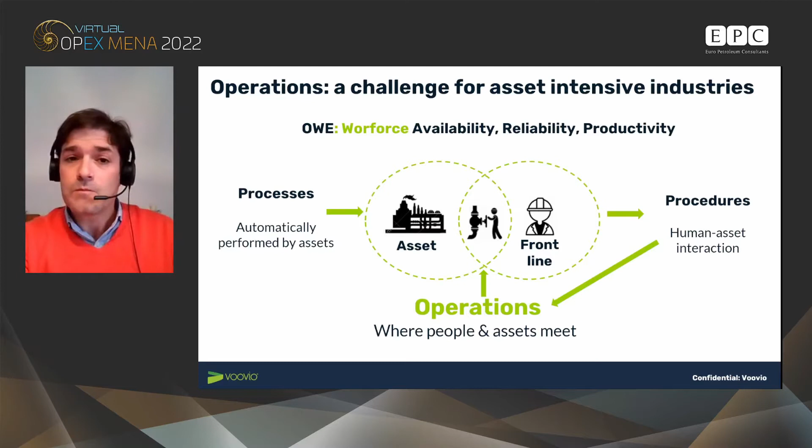Now what we kind of see is that there is a lot of investment done in the asset side to extend the life cycle of the asset. But what about the other side of the equation? What are we doing for our people that are running the assets? Because let's be honest, just putting in their hands a PDF is not enhancing or making their job easier. This is what we are bringing to the industry: a platform that is enabling frontline workers to do their job in a more reliable and productive way for basically the P&L of the plant. So quickly, let me jump into our demo so you understand the nature of our product.

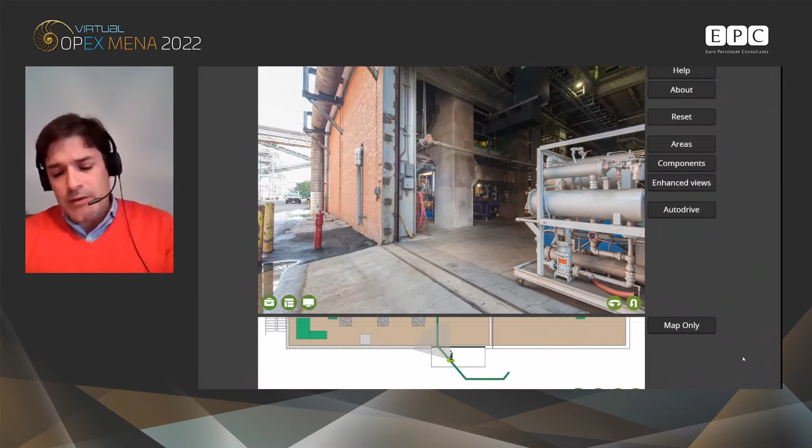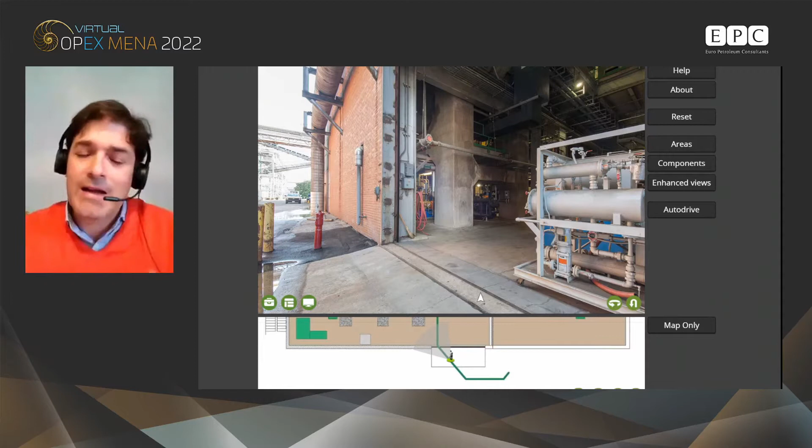As mentioned before, we have an operational excellence platform, and the first step we take to create the platform is create what we call a digital replica using our proprietary technology called enhanced reality. Now what is this about? As we are doing this event virtually, maybe you will see a little bit of lag because I'm doing this real life, so please bear in mind that in reality it's completely smooth what you're going to see.

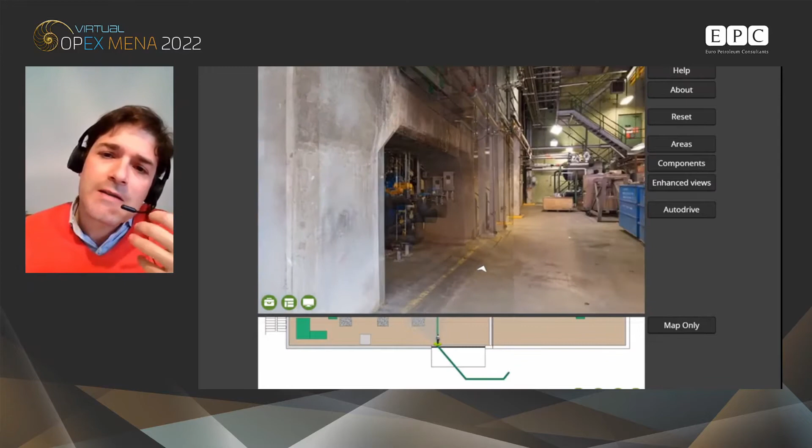Now here you see there is a white line showing up, this is because I'm clicking my mouse. When I drag my mouse forward, you will see that I accelerate, and there is a moment that a transition happens. As you can see, I'm walking in this powerhouse in a complete free way, such that I can make decisions where I want to go, where I want to stop. Here you can see there is even a crossroad, and I could say, hey, I want to go to the left, or just drag my mouse to the left and continue my journey.

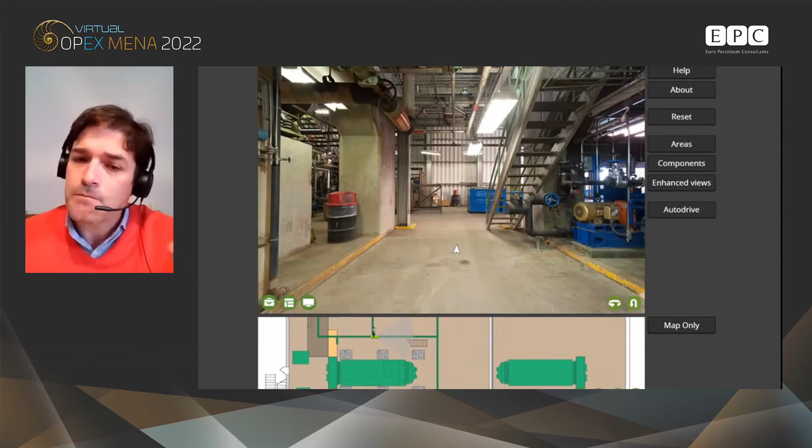I can stop anywhere, I can look around, I can make a U-turn by double clicking my mouse. This is the magic of our technology, creating a photorealistic environment that you can traverse in a continuous way, which is basically bringing immersion to the user, to our field operators, that is critical for the simulators we will see in a minute.

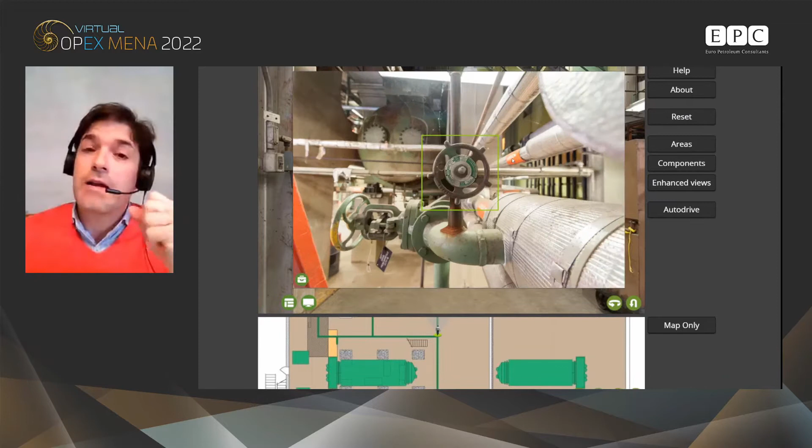Now, what are the things we have in the replica that are really useful? You see here a green box that when I click on it, I will get a detailed view of this component. I can actually interact with it, I'm the one who is right now opening and closing the valve. This is common in our replica: whenever you see a green box, it means there is a component there that you can interact with, and it will behave as in reality.

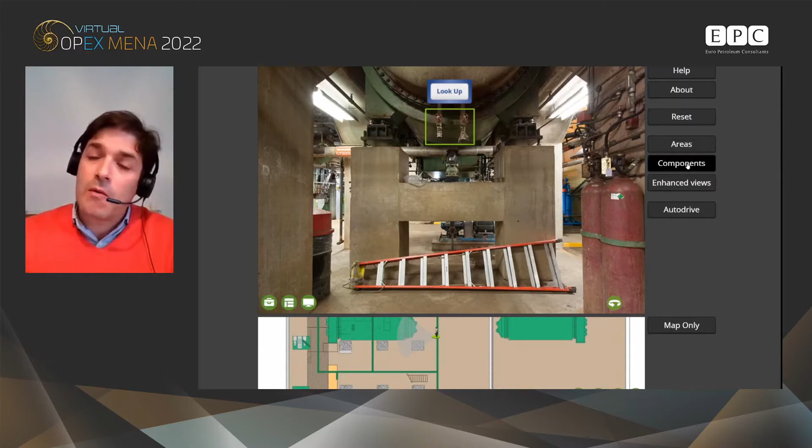Now, all these components are accessible by our components list, which is giving access to the field operator to all of them, and you can even do a predictive search — say I'm a maintenance engineer and I have to go do an intervention in 119, instead of popping up the P&ID and walking down the line or calling the SME, I can just go here, type in 119, and here we are.

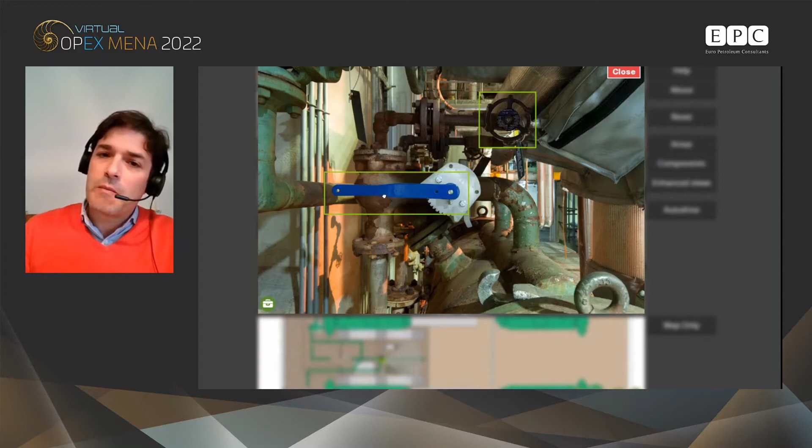The system just brought me to the butterfly valve that is actually in the mezzanine level, as you can see in the map. So right now we are in between the two turbines next to the stairs. And this is very important.

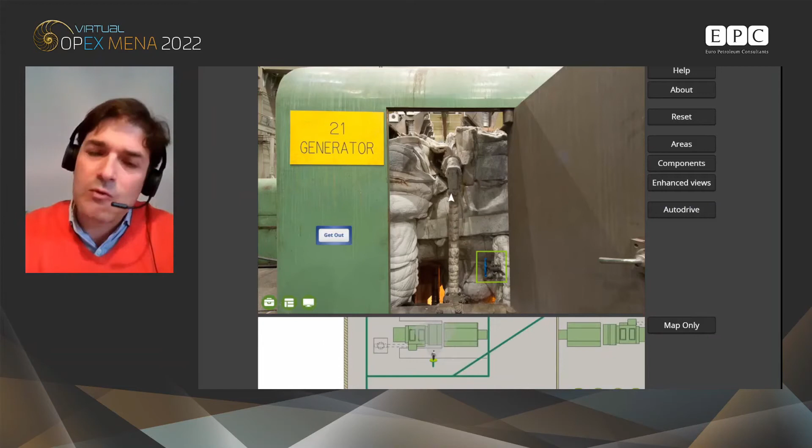This is the nature of our technology, which is visualization. This is not intended for engineering purposes. This is about the field operator being able to find himself in the asset and not being dependent on an SME or another operator.

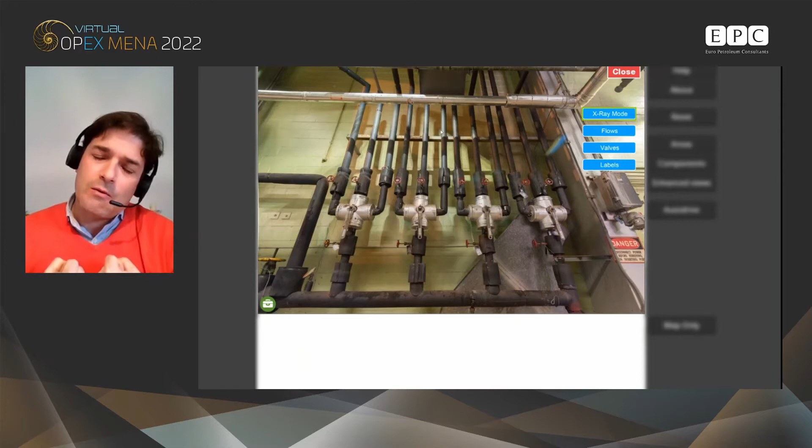Now, another feature that we have in the replica that is very relevant is what we call the enhanced views. This is a way of explaining how complex systems work from inside out. You see this manifold, perfectly well designed, everything parallel, perpendicular, but from an operations perspective, this could be intimidating, precisely because everything looks the same.

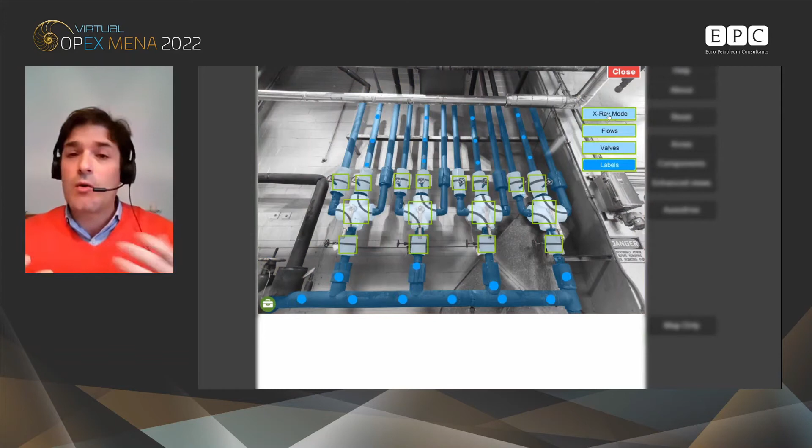So what we're doing is giving the operator the option, by clicking these buttons here, the X-ray mode and the flows, to see what is going on inside the system. So here, let me show you what happens.

I'm on the right-hand side of the screen, and I'm going to align the upper line with the downstream loop. So I can go here and say, okay, I'm going to open this valve, open this bypass. So here I've been able to see how to connect the downstream loop with the upstream loop in a very simple manner, right?

At the end of the day, as you can see, what we're doing is giving our operators the capability of understanding what's going on inside the system prior to doing any execution in the field. So we are, at the end of the day, bringing confidence to them.

Now, this is very quickly, I have shown you the replica. Now we move on, and our platform again is about covering all the bases of the field operator. That means the next part is creating simulators of the standard operating procedures that we just saw before in the graph. This is the nature of the work that the operators do in the field, which is execute procedures. So what we do is create simulators for each of them.

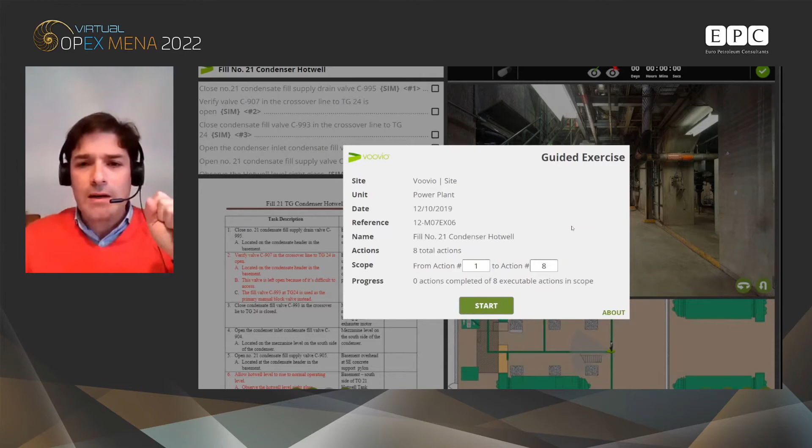So here we have 5 different SOPs, and for all of them we create 5 different modules. The first 4 are basically aimed at training and qualification of the people, and the last module is aimed at execution in the field. So very quickly, let me show you how the guided module looks like.

As you can see, we have the replica here on the right-hand side, and here on the left-hand side we have the SOP itself, everything related to the SOP, the document and the checklist. So the system is guiding me.

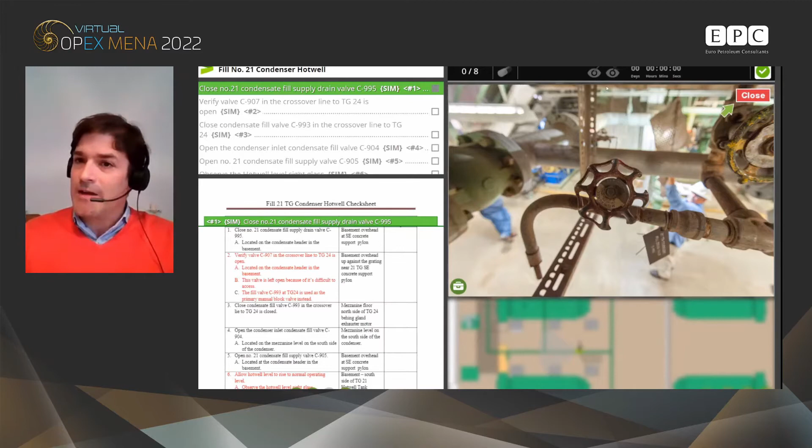So it's telling me, hey, first of all, you need to close this valve. Okay, so I go and do it. I close it. The system acknowledges that I have done it, and it tells me to click check. Okay, great, do it. So now it moves me to step number 2. And here is a hidden valve behind that line.

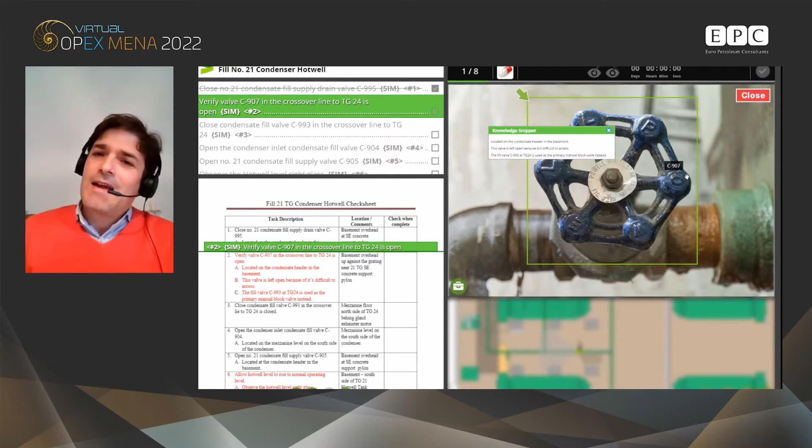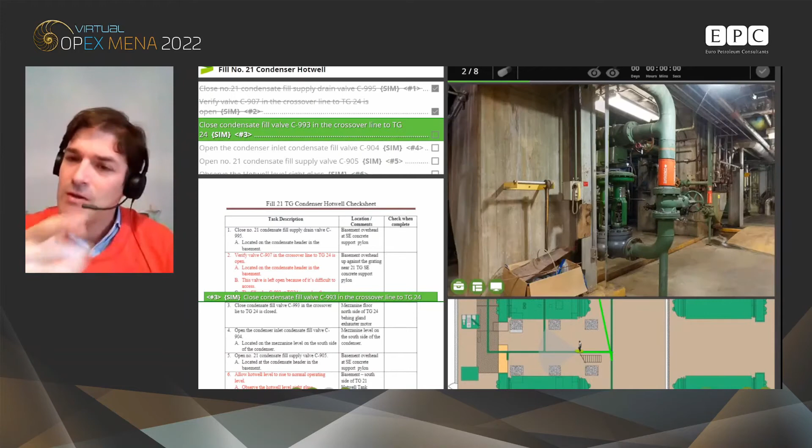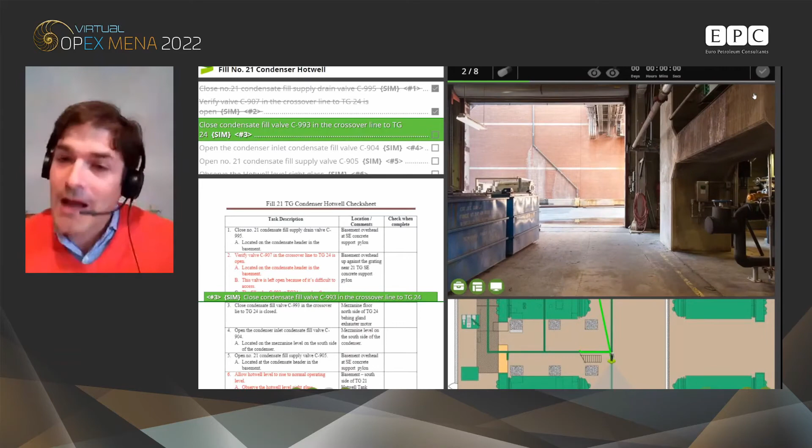And here pops up something really relevant, which is what we call the knowledge snippets. This is a way of capturing tribal knowledge, taking the expertise of your senior people and putting it in a place that is relevant to the operations. Understanding or knowing that this valve is always open because it's very difficult to access is always relevant to this particular SOP in this particular action. This is what the knowledge snippet is doing, enabling the organization to capture the tribal knowledge and make it owned by the company and shared in a standard way with the rest of the organization.

So as you saw, I just did the second step, which took me to the third step. So this is, very quickly, the guided module.

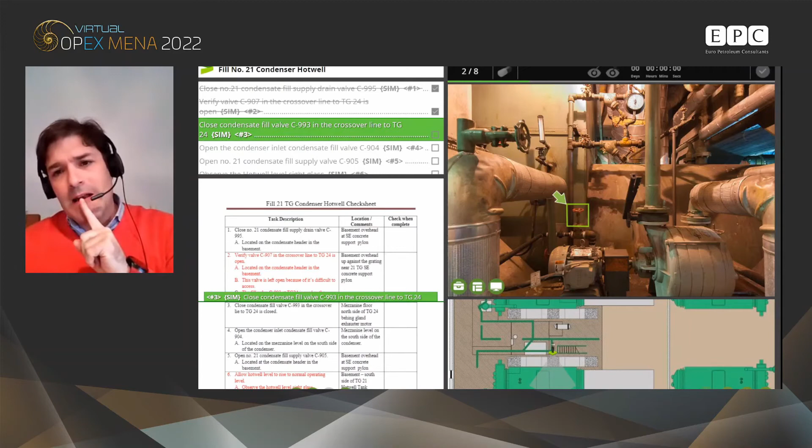Now, imagine you're a field operator and you say, hey, I've been doing this guided module for the last 10 times, I feel that I know what I have to do. Okay, great, so go to the test. And this is what we have here, the test module. Now, as you can see, nothing moves. There is no aid.

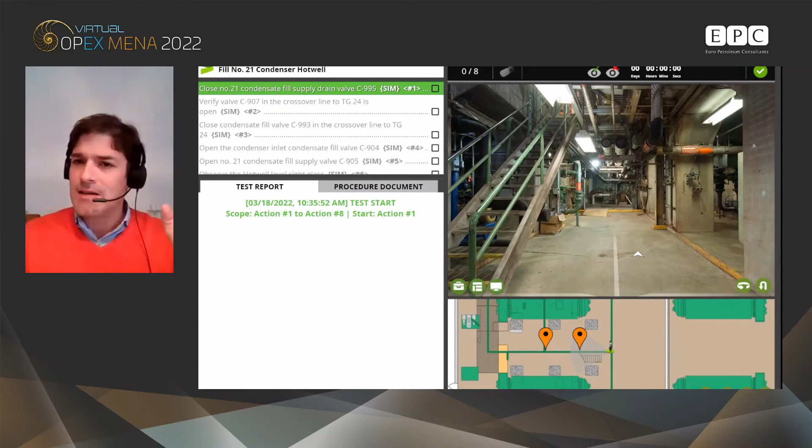This is like the real thing. You have the checklist and the SOP, and you have to prove that you know what you're doing. So let me show you very quickly what happens when you do the first step correctly. So I know this is the first component. I click check, and the system tells me, yep, you did it correctly.

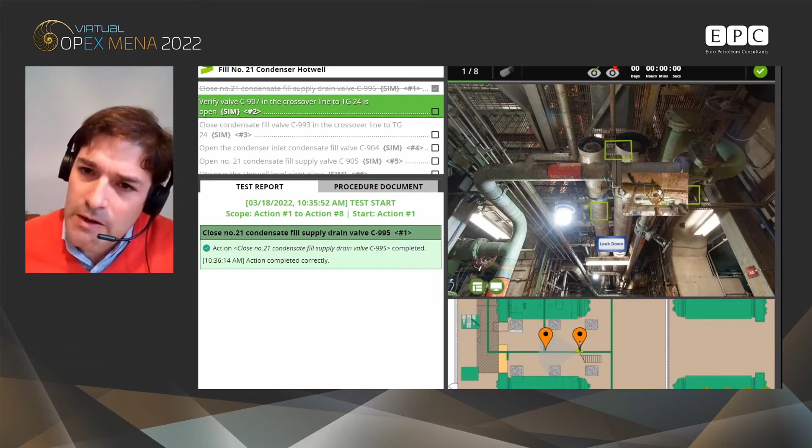Excellent. Let me show you what happens when you make a mistake. So here I could get confused. This is the second instrument. And the system is telling me, nope, you made a mistake. As you can see, you manipulated another instrument, 905, and now the test is giving us a couple of options.

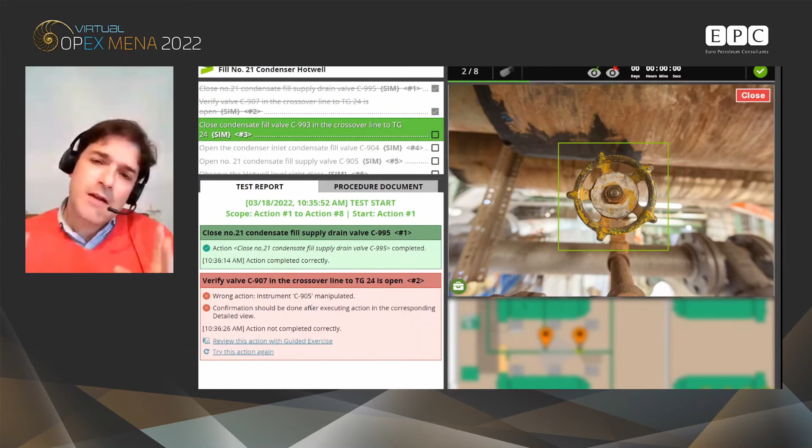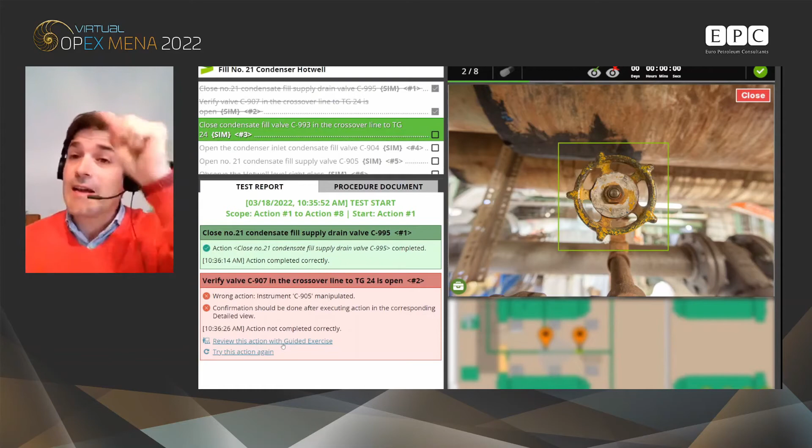One is to continue the test as such, review this action, as you can see in the red box, this action in the guided exercise, or actually try it again. So, and this is what I'm going to do. Try it again. So when I click, as you can see, everything resets.

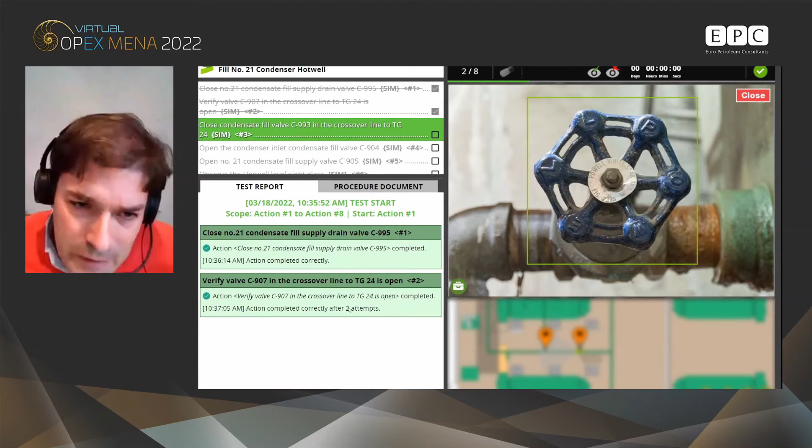And now let me show you what happens when I do it correctly. This was the one that is hidden, it's already open. So here we are. When I click check, and now the system tells me, yep, you did it correctly. But if you read carefully, you will see that it says 2 attempts is what it took you.

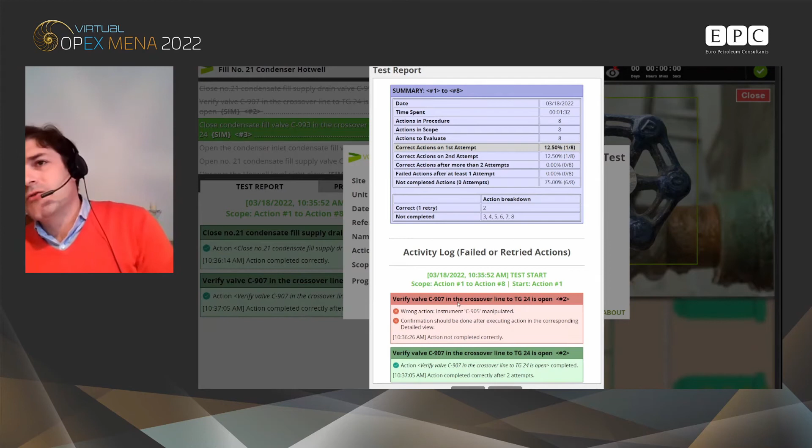And this is because we are recording everything in the background. And all this data is collected in a data format and made available to the organization, to our customer. And we collect the data related to the execution, and in particular with the mistakes that the people have made in the field. Why is that? Because all this data is fed into our platform, made available to our customer.

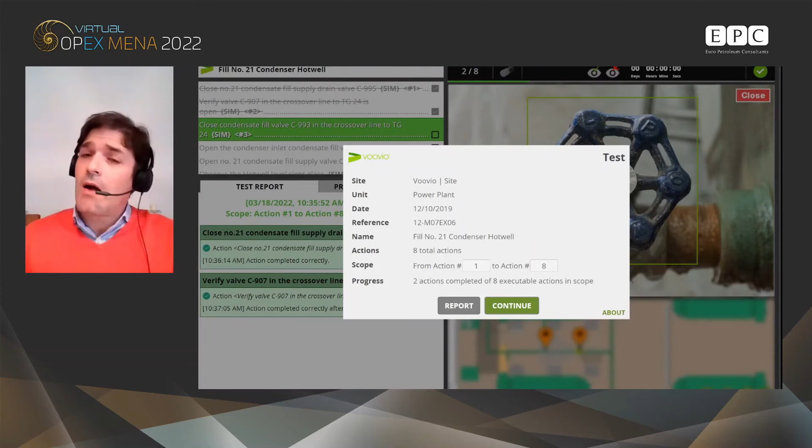I'm not going to go into detail, but I just want to show you one sneak preview of one thing, which is with all that data, we can build what we call the competency level of your shift or your crew of people with respect to a particular SOP.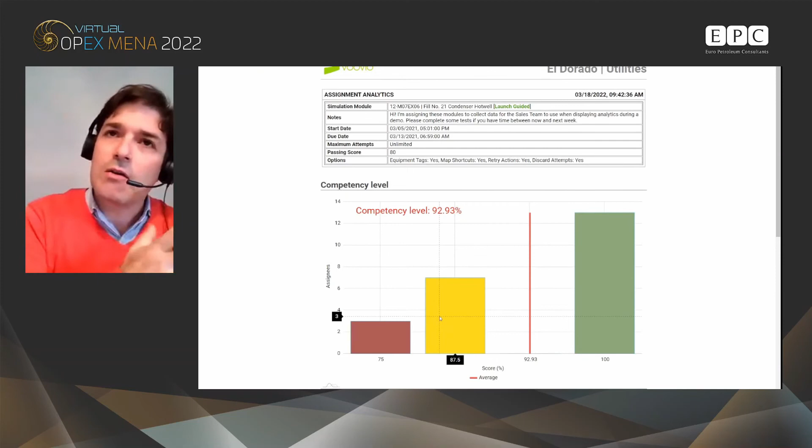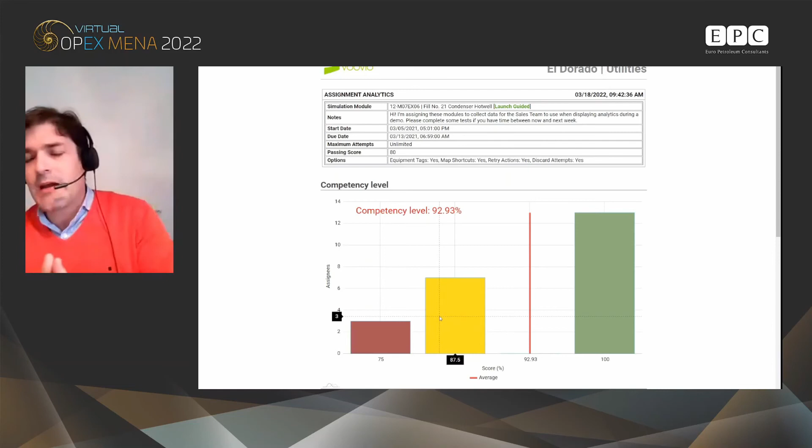Thanks to us collecting this data, we know where the people fail their knowledge, and we can actually tailor the training and enhance their training with that particular respect. Now, this has been very quickly, so now let me go back and show you the benefits that our customers are gathering with this platform.

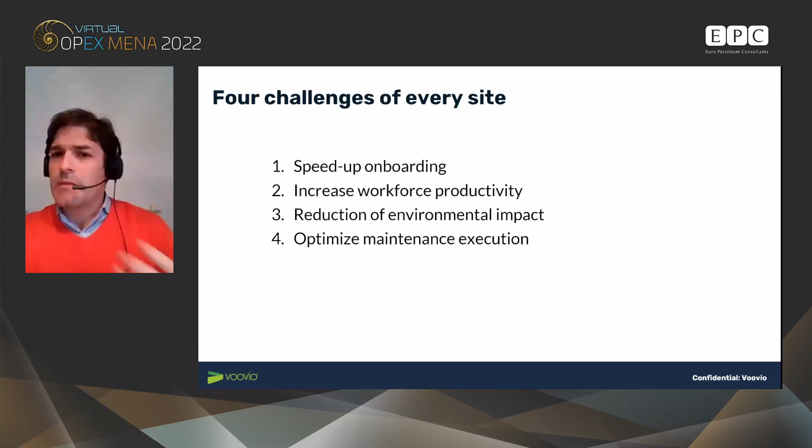4 success cases. So where are our customers realizing value? Basically around 4 points: speeding up onboarding of new people, increasing the yield of their plants via increasing the productivity of the workforce, or said in a different way, reducing errors in the field, reduction of environmental impact, and actually optimizing the turnaround execution.

Very quickly, speeding up onboarding. Here you have some data. I'm not going to go through it, just to highlight one thing, which is we see on and on through different customers that we are cutting by half the time required to train new operators.

Which at the end of the day reflects in 2 basic points: you free up time of your SME, so he can do the actual work, and also it's reflected that you are giving the freedom to your new operators to train at their own pace, not relying on a physical SME, but a 24/7 digital SME available in the computer, in the tablet, in the field, wherever they need it.

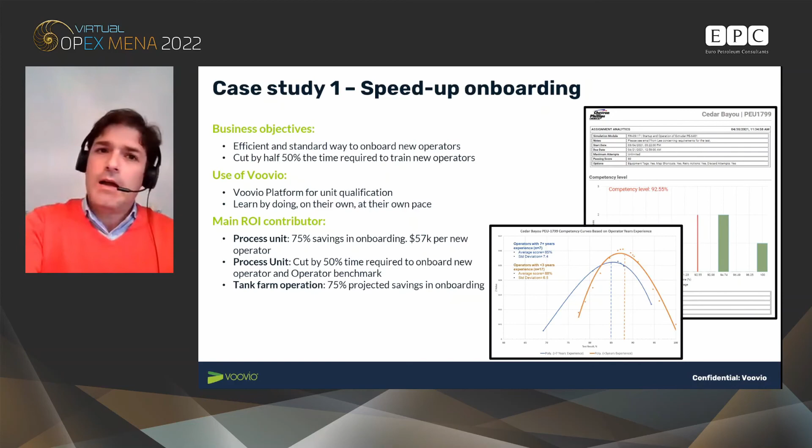Another saving related to workforce productivity. Again, as we are seeing, some people are retiring. The senior baby boomer generations are retiring. The knowledge is going through the door, and we are seeing that because of this, mistakes are being made in the field because people are not proficient at executing particular SOPs.

And here's where we are seeing that thanks to our capability of building this competency chart prior to the execution of a task, and then having the operators take the SOPs with their tablets, the field execution module that we haven't seen—but anyways, just bear in mind that we have a module to use in the field—people don't make mistakes.

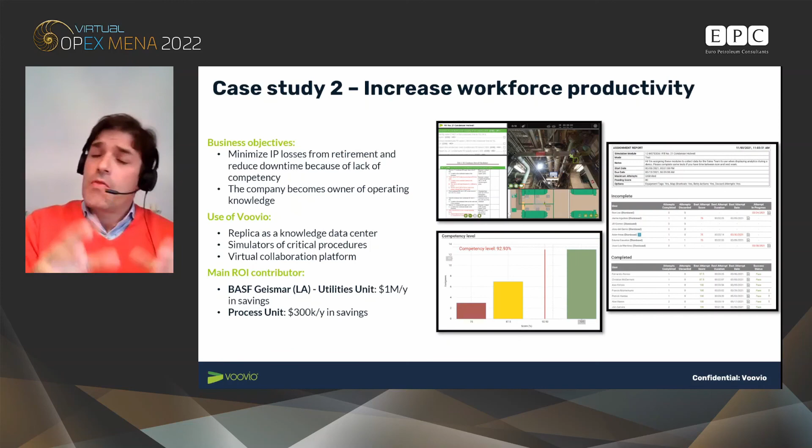Third factor, again, this is related to instead of affecting the yield of the plant because of an error, this is when you have an environmental spill, something that could affect the environment, and then you have to notify the regulatory agencies, and fines could be brought into the table.

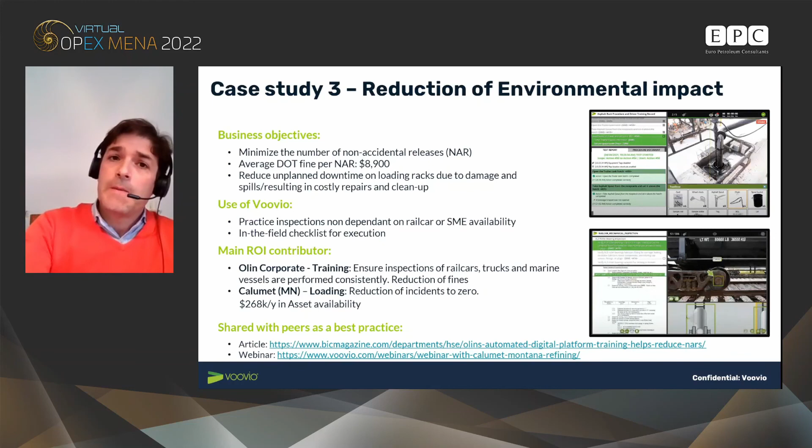And the last thing that we are seeing is we are also optimizing the execution of turnarounds and maintenance activity. Why? Because the operators and the millwrights and the maintenance people can train, can rehearse what they have to do prior to getting into the shop, dismantling everything and then putting it back together. They are able to get acquainted with everything prior to executing.